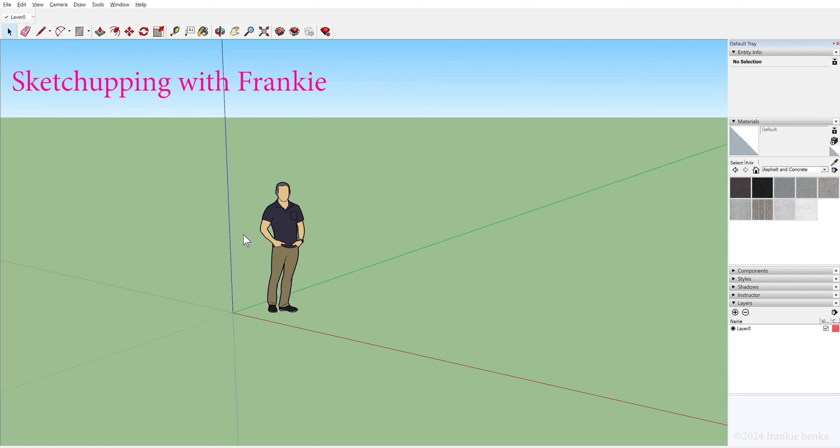I didn't get a video capture of the rafters, so I'm going to go through the process step by step and give you some tips and shortcuts to make SketchUp go faster. This is not how I would build rafters, it's just a demonstration of how to draw rafters in SketchUp.

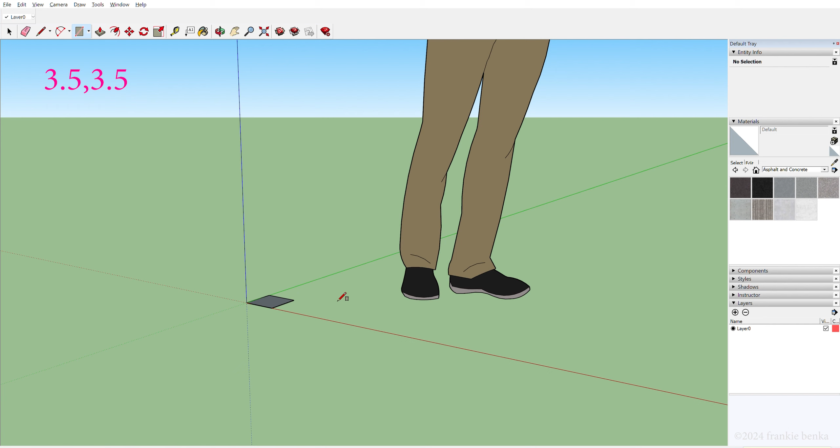The first thing to do is draw a 4x4 post. Click R on the keyboard, drag in the direction you want the post drawn, type 4x4, then enter. If you want to draw the actual size, type 3.5, 3.5, or 5.5, or whatever.

Whenever you start making an object, always make a group or a component first. Double-click the square to open the group. Click P and pull up, then type 8 apostrophe. It's the single quote on the quotation mark key.

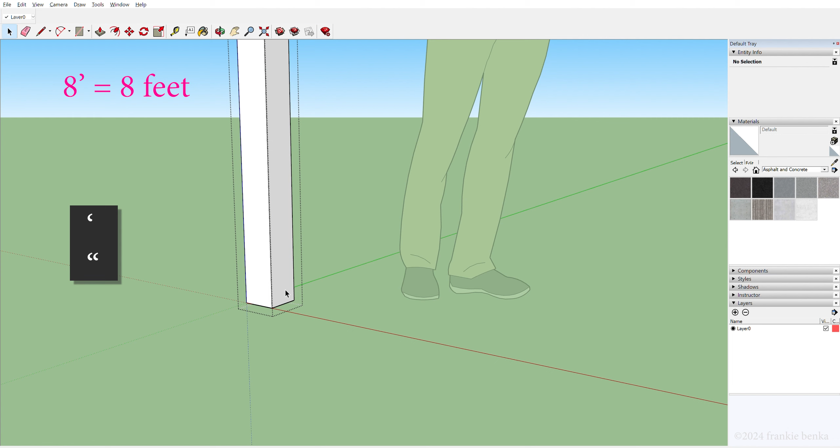That's what I mean when I say feet. Then press enter and your post will go up to 8 feet tall. Click outside the object to close the group. You can alternately type 96, enter, for 96 inches.

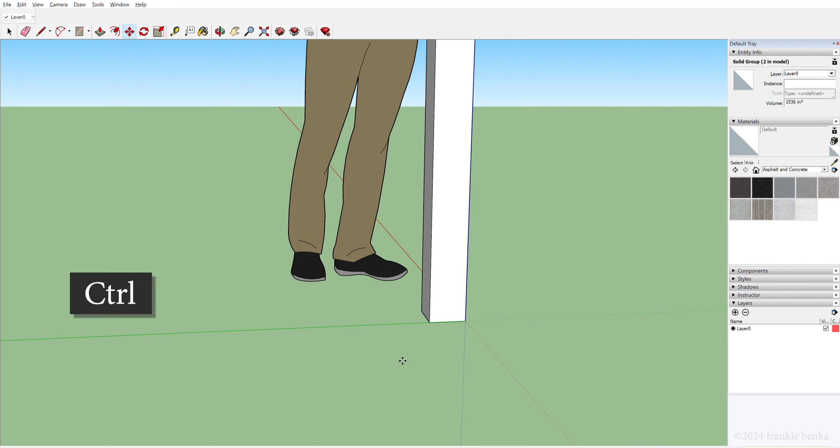Now select the Move tool by clicking M, click on the bottom corner of the post and drag to the left while clicking the Control key. Type 12 feet and press enter. This will make a copy of the post 12 feet away from the first.

Zoom in on the top of the post and create a rectangle that is 4 inches by 10 feet. Start your rectangle and type 4,10, then enter. Immediately double-click the rectangle and then right-click and select Make a Group.

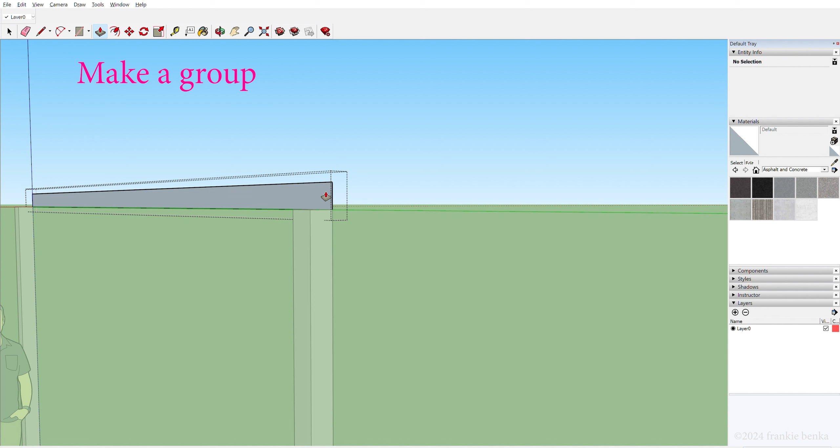Then double-click the group and use the Push-Pull tool by selecting P and push or pull in the direction you want to draw the board, and then type 2, then press enter. This will make your board 2 inches wide.

Now use the Rotate tool by pressing Q. Click on the bottom left corner, then click again somewhere along that same edge and drag up. Make sure that the piece you want to move is highlighted in blue. The blue piece is the one that is going to move.

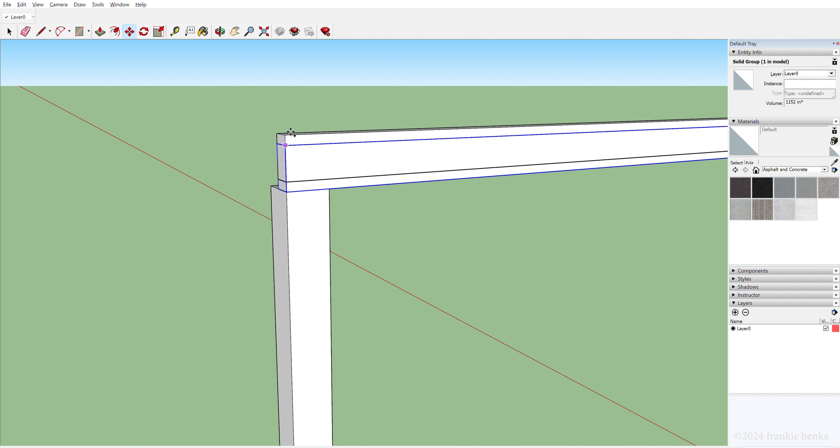Here I made a copy for the other side to speed things up. With the protractor, drag up and press 30 or whatever degrees you want. You will have to figure out what degree your pitch is.

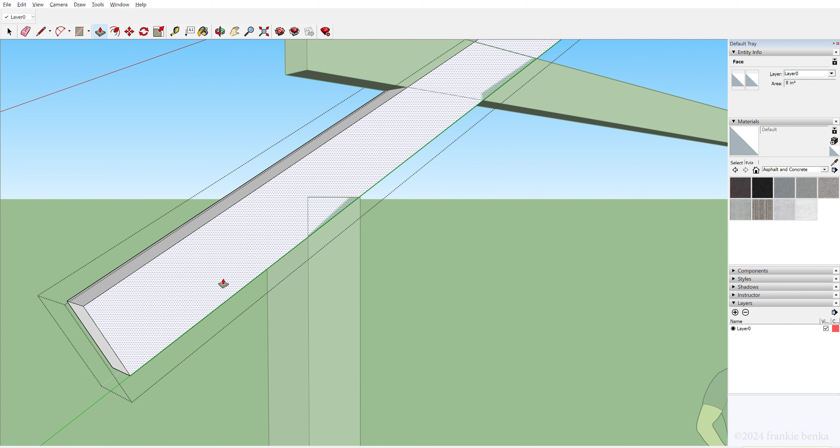Use the Move tool to drag the rafter down on the post. Double-click the rafter to open the group. Pull the end of the rafter out and type 12 for a 12-inch overhang. Use the Pencil tool, L, for lines, then draw 2 lines on the rafter where it intersects the post.

Use the Push tool to push the little triangle back to the end of the rafter. You can type 2 or the thickness of the rafter, or put your cursor on the back edge of the rafter and click. Now click outside the rafter to close the group.

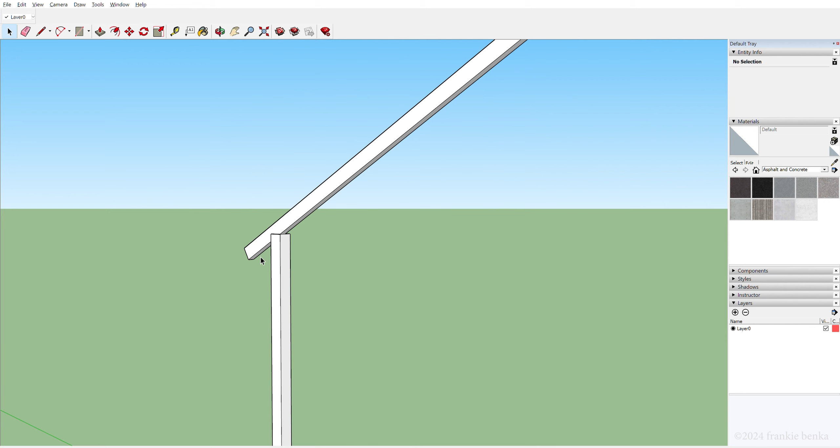I decided I wanted a mirror image of the first rafter, and there is an easy way to do that. Use the Orbit tool to get a bird's eye view. Switch to the Rotate tool, Q, and hover over the green ground. Holding the Shift key will lock the protractor on the blue plane.

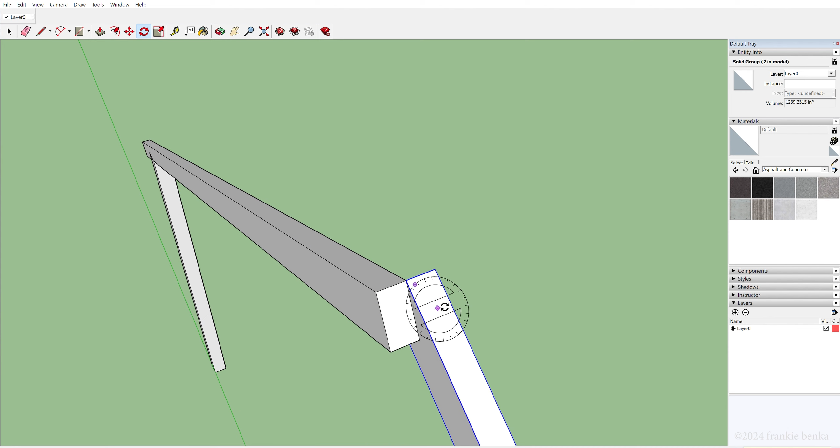Click on one of the top corners of the rafter. Click again along the length of the rafter on the green plane. You will see a green dotted line. Drag the cursor to rotate the rafter. Type 180, then enter. Use the Move tool to align the ends of the rafters.

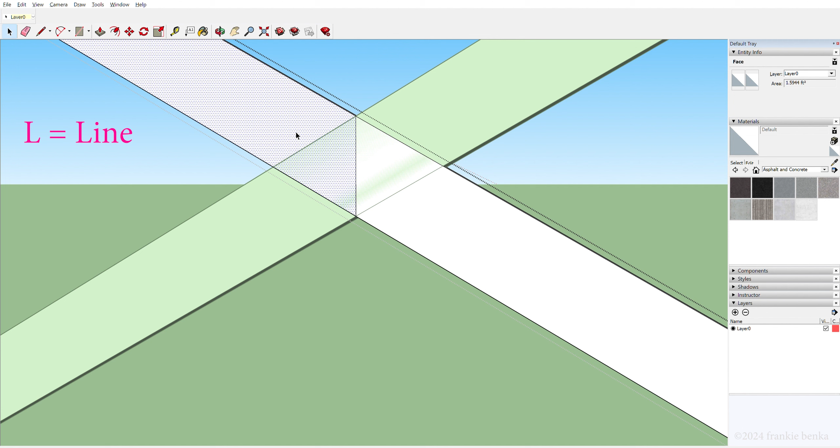Move the new rafter over so it sits on the post. Double-click on one of the rafters to open the group. Draw a line with the L tool from the top to the bottom of the intersection of the 2 rafters.

Use the Push-Pull tool to push the top section of the rafter backwards to cut it off. Do the same with the other rafter. Make sure to close the group.

I wanted to put a gusset at the peak of the rafters just for illustration purposes. Draw a rectangle over the intersection of the rafters. Double-click and make a group.

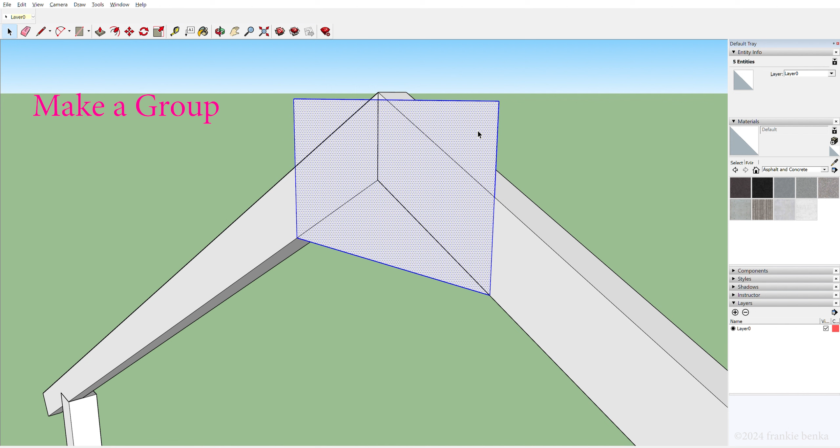Open the group and pull towards you. Type 0.5 to make it 1/2 inch thick. Before closing the group, scribe lines along the back along the rafter and push the offcut back. Click and it will vanish like magic. Click outside the gusset to close the group.

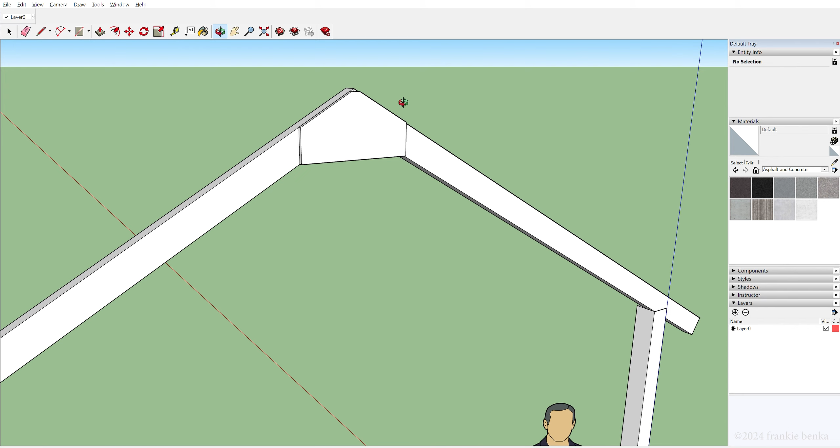Now what you can do is select everything by dragging from left to right. When you drag right to left, you will select everything that is partially intersected. When you drag left to right, you can only select things that are wholly selected.

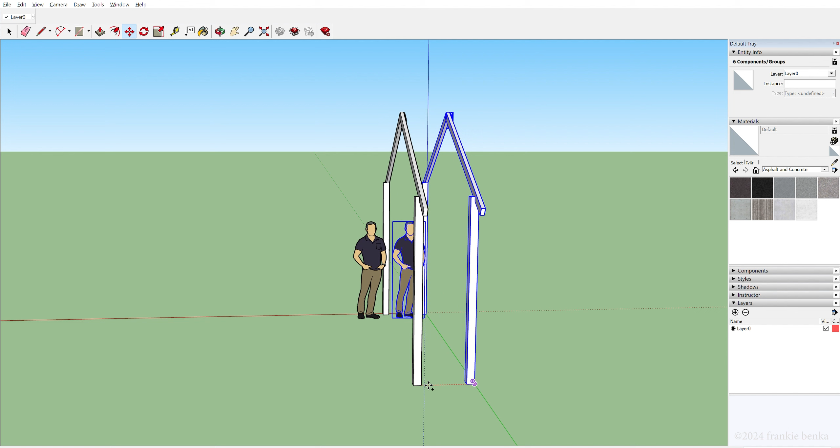After typing 24, then type 10x and the assembly will be repeated 10 times. We don't need an army to build a shed, so we can delete the dudes.

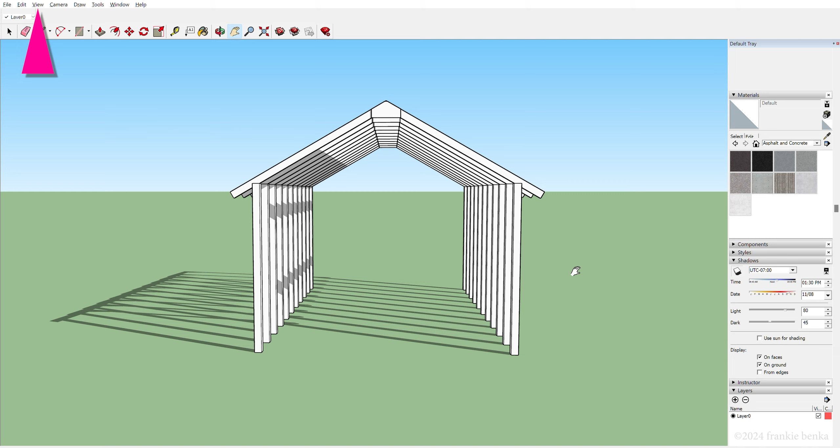Then turn on the shadows for a more realistic view. Go up to the menu at the top, click on View, then click Shadows. The time of day and year can be set in the menu on the right side of the screen.